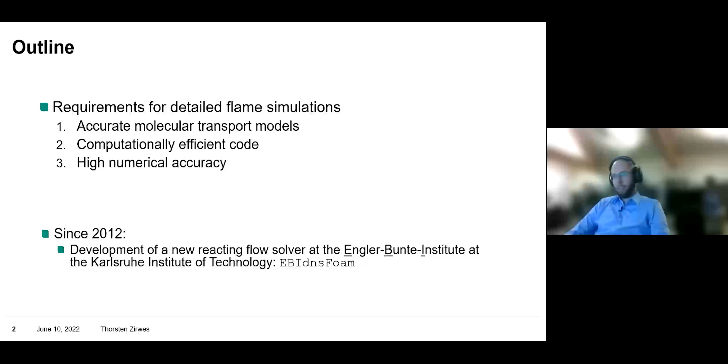In 2012, we started development of a new OpenFOAM solver that we call EBI-DNS-FOAM at the Engler-Bunte Institute at KIT, and since 2013 I became the lead developer of that code. In the meantime, the code is shared with many different groups - more than 20 research groups around the world are using it, and it's also used in industry. Over the past couple of years, some of the developments I've done have also been contributed back to both OpenFOAM and Cantera, which means I'm now listed as co-author of Cantera and contributor to OpenFOAM.

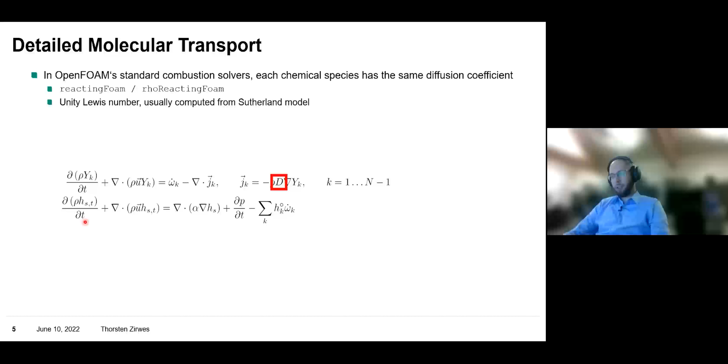Let's start with the first requirement: how do we get detailed molecular diffusion into our OpenFOAM solver? If you run any type of reacting flow simulation with the standard OpenFOAM solvers, for example reactingFoam or rhoReactingFoam, then what you are solving are basically the equations you see here. Here you see the balance equation for the species masses with convection, chemical reactions, and diffusion. Then we have an energy equation for the total sensible enthalpy. In the standard OpenFOAM solvers, the diffusion coefficient is the same for all species, which means OpenFOAM employs basically a unity Lewis number approach, and typically you compute your transport coefficients with a Sutherland model.

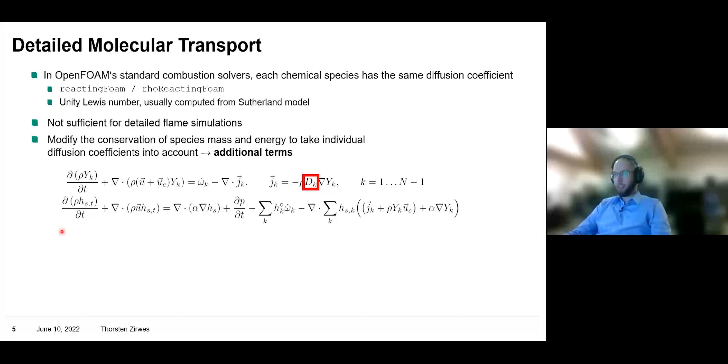But for us this is not sufficient, because we want to resolve the whole flame - we want to resolve all the species profiles. So we need detailed molecular diffusive fluxes, which means first of all we have to modify these equations. In our new solver, the equations we are solving look like this: first, you can notice that now the diffusion coefficient is different for each species. However, this also has some implications which lead to two additional terms. One term here is the correction velocity.

Depending on which diffusion model you choose, commonly you will choose the mixture average diffusion model, also known as the Curtiss-Hirschfelder approximation. It is not necessarily guaranteed that your diffusive fluxes add up to zero.

So then you define a correction velocity, and this correction velocity will take care that all your diffusive fluxes do add up to zero. Also, when all of your chemical species diffuse at different velocities, they have different contributions to the energy equation. This is why you get the second term here, where we take into account the different energy carried by the species moving with different diffusion velocities.

Then what you want to do is compute all of your transport properties, which means viscosity, heat conductivity, and the diffusion coefficients from detailed models, in our case from kinetic gas theory, which means first of all you need some accurate mixing rules.

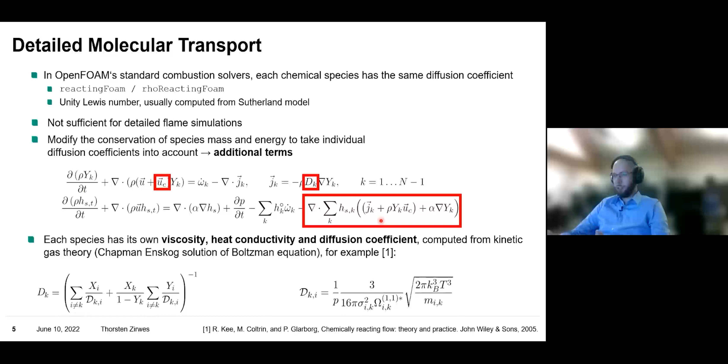How do we achieve these kinds of detailed simulations of the computations of the diffusion coefficients? This is done by coupling our OpenFOAM solver to Cantera. I think many of you will know Cantera. Cantera is an open source library which already implements all of these detailed models that we can then use to compute the transport coefficients.

We follow an idea that was first made by Gschaider and Rhem, who were the first to couple OpenFOAM and Cantera.

So the basic idea is, in OpenFOAM, we solve our basic governing equations, which means our total conservation of mass, the conservation of momentum, or Navier-Stokes equations, conservation of energy, which in our case is the total sensible enthalpy, and all of our species mass fractions.

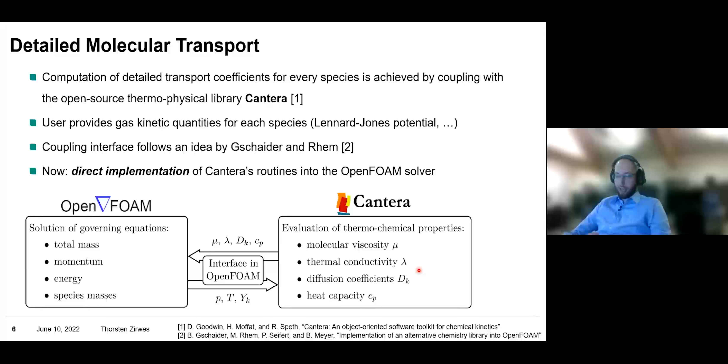And then in Cantera, we compute all of our detailed transport coefficients, as well as thermophysical properties like the heat capacities. By now, all of the Cantera routines that we need are implemented as its own OpenFOAM thermal library. So if you use our code right now, you don't even have to compile Cantera as an external library. You can directly compile our OpenFOAM thermal class, and everything is included there.

Of course, we also want to make sure that our code is correct. So therefore, we have a suite of validation cases. One of the most simple flame setups is a one-dimensional, perfectly premixed, freely propagating flame.

The idea of that flame, if you're not familiar with this, is we have a one-dimensional domain. In this case, for example, I computed a methane air mixture with a GRI 3.0 reaction mechanism on a one-dimensional domain, 10 centimeters in length, 10,000 cells.

Initially, the left half of the domain is filled with unburned gas. The right side of the domain is filled with the hot burnt gas. On the left, you have an inlet where your unburned gas is flowing into the domain. And if the inlet velocity is equal to the laminar flame speed, you will develop a steady state flame inside that domain.

And then we can run this simulation in Cantera and also with our OpenFOAM solver and compare, for example, the species profiles inside that flame.

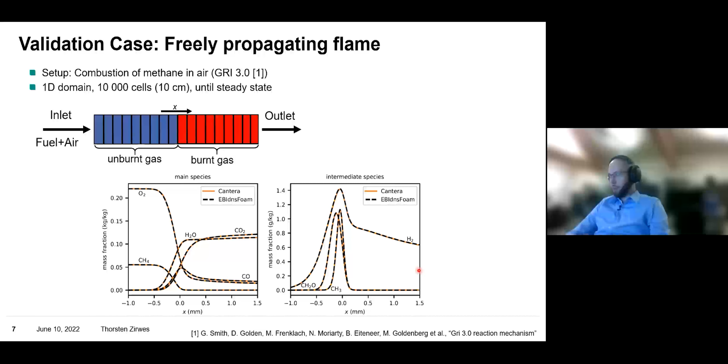And also, if we look at intermediate species, then of course, again, we see perfect agreement. Now that we can capture detailed flames...

We also want to make sure that the OpenFOAM solver itself runs as efficiently as possible so that we can run very large flame simulation cases. And for those of you who have run flame simulations with finite rate chemistry and a large number of chemical species and chemical reactions, you will know...

...that in these types of simulations, most of your simulation time may actually be spent on computing chemical reaction rates. So we came up with basically three solutions that help us cutting down the simulation time by a lot. In the following slides, I will go through these three steps.

The first step is to not use OpenFOAM's own ODE integrators. What we usually do in these types of flame simulations is have an operator splitting approach, where we do not use the reaction rates directly as source terms for our balance equations, but first compute an average chemical reaction rate averaged over the CFD time step.

For this, we need ODE integrators. The ones provided by OpenFOAM work, but they are not the most efficient. So we found that the CVODE integrator by Sundials performs very well and is very stable.

Secondly, we want to make sure that the code involved in computing chemical reaction rates is as optimized as possible. To achieve this, we employ automatic code generation. The idea is we have a tool that reads in a reaction mechanism and generates highly optimized C++ source code, which is very efficient at computing chemical reaction rates.

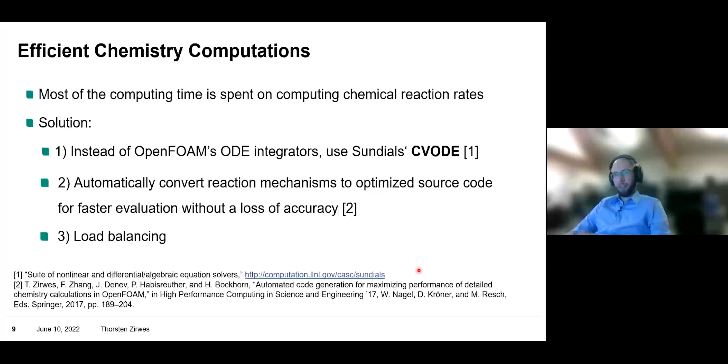So why do we need to take care of the chemical reaction rates? Why do they take so long? As probably most of you know, in reality, even for simple fuels like methane, unfortunately the chemical reaction is not as simple as this. In reality, it looks more like this.

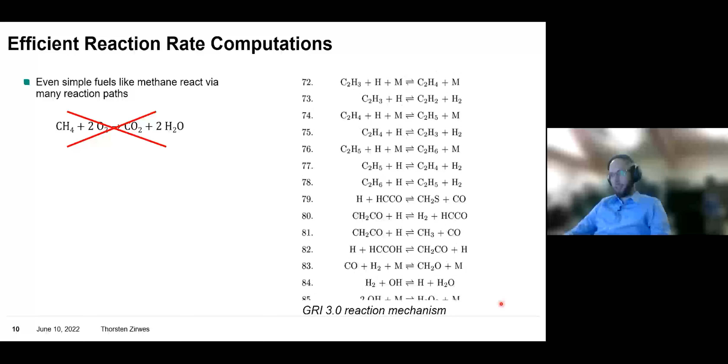Here you can see, for example, the GRI reaction mechanism. During the combustion of methane, you have a lot of intermediate chemical species, and these will react with hundreds, depending on your mechanism and case, maybe thousands of chemical reactions. And this, of course, is expensive.

It's not only expensive because we have a large number of chemical reactions, it's also expensive because some of those reactions are very fast. In general, you don't want to use these reaction rates directly as source terms for your balance equations, because then you have to run your simulation at the time step of the fastest chemical reactions. Instead, what we do is we use operator splitting.

So if we want to use our chemical reaction rate omega for species K, which is defined as the change in time of the species concentrations, what we do is we first assume that every cell in our computational domain is a closed batch reactor. So we completely ignore convection and diffusion, and then we can reduce our equations to a set of ordinary differential equations, ODEs.

And then we just integrate our reaction rates over the CFD time step dt. And then again, we need an ODE integrator, which takes many small time steps for the chemistry integration over one time step in the CFD simulation.

And then what we have is our species concentration at the beginning of the CFD time step, and the species concentration at the end of the ODE integration. And with this, we get an averaged reaction rate over the time step.

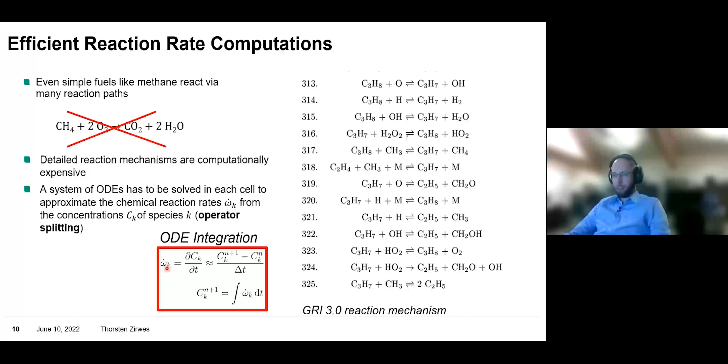And again, this is very time consuming. So in general, you want to use very fast ODE integrators, for which we use here CVODE by Sundials.

Now that we are using a very good ODE integrator in our new OpenFOAM solver, we can then do some more profiling of the performance of the code. So even though we are now using a good ODE integrator, we still might spend more than half of the total simulation time on computing chemical reaction rates.

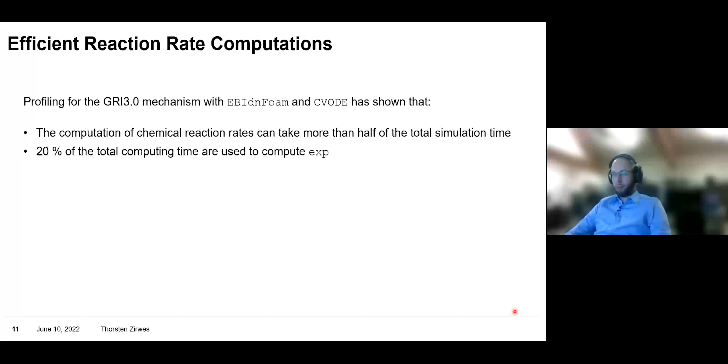What I'm going to show you next is profiling of the performance of our code using the GRI 3.0 reaction mechanism with the tool perf, a very simple profiling tool which is part of the Linux tool set. What you see here in this line is that we actually spend 20% of our whole OpenFOAM simulation on evaluating the exponential function. And of course, this is a lot.

So we want to reduce the time spent in the exponential function. Why do we need to evaluate that? Because of the chemistry, of course. One big part is the Arrhenius law. For each of our, let's say, hundreds of reactions, we need to compute our rate constants k. And if they follow Arrhenius law, then we have to compute the exponential function of the activation energy divided by the universal gas constant times the temperature.

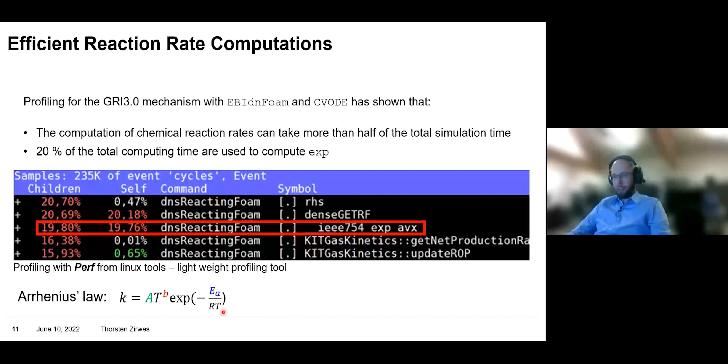Now, what's the concept of optimizing the computation of chemical reaction rates without losing any accuracy in our results? The general idea is the following: in most CFD tools, like OpenFOAM, the way you compute chemical reaction rates is by providing, first of all, a text file.

Your reaction mechanism file contains all of the parameters, let's say the Arrhenius parameters, for all of the chemical reactions. For Cantera, it might be an XML file. For Chemkin, it might be a dot input file.

But in general, it's some kind of text file. When you run your simulation, your CFD tool, let's say OpenFOAM, reads in this text file, and then on the fly will construct the different types of reactions and compute the chemical reactions based on that information.

What we want to do is not use a general implementation that works with any type of reaction mechanism. We want to use, for every different reaction mechanism, a different library which contains highly optimized source code, specialized on computing the reaction rates for that one reaction mechanism.

Therefore, I created a tool which reads in the text file, or the XML file in this case, of the reaction mechanism containing all the data for all the chemical reactions. And then it performs some optimization steps.

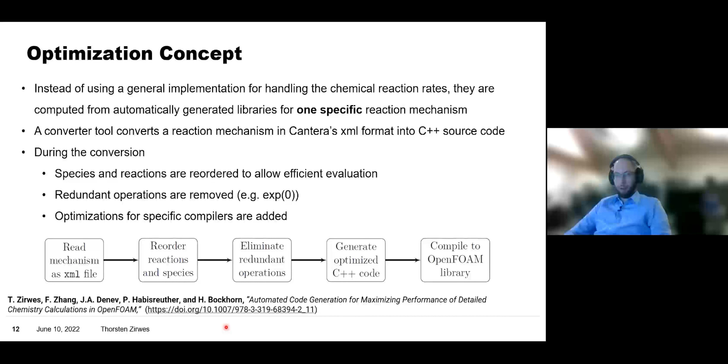And then the tool generates the C++ code to specifically compute reaction rates for one reaction mechanism. If you compile that C++ code, it will then generate an OpenFOAM library, which you can directly use to compute the chemical reaction rates.

Let's make an example. I won't go too much into details, but this would be an example for the XML file, the text file containing the reactions for the GRI reaction mechanism. This here would be the section for reaction number 316. And here you find the 3 coefficients for Arrhenius law: A, B, and the activation energy.

Now my converter tool reads in this reaction mechanism, does operations like reordering reactions and species, eliminating redundant operations, and then generates this C++ code. What you see here, for example, is a long list of all the values of A, B, and the activation energy divided by the gas constant for all the reactions in the GRI mechanism.

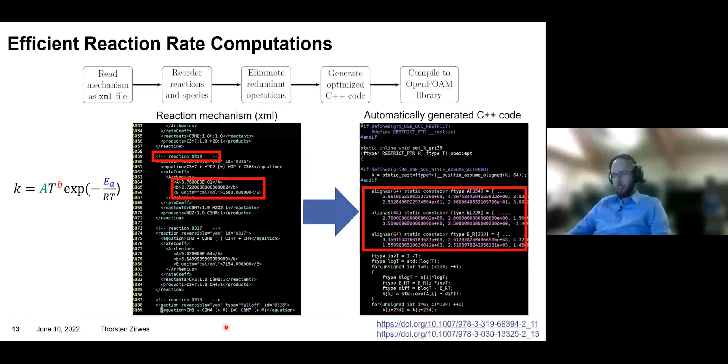For those of you who are interested in details, I will quickly show you some of the types of optimizations that are performed when generating the source code.

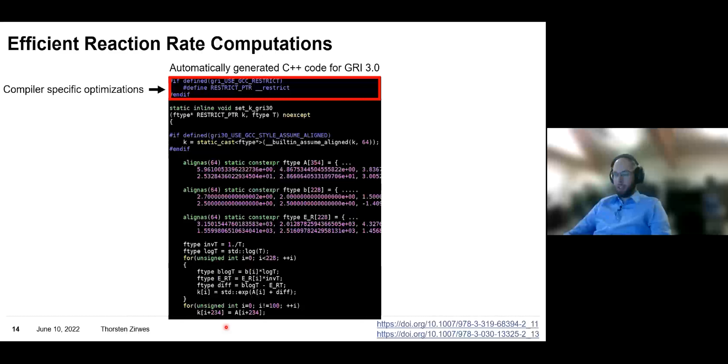At the top, you see some compiler-specific instructions. If you want code that is as fast as possible, you cannot use just standard C++. You have to use some compiler-specific features. Here, for example, for the GCC compiler, we use some specific intrinsics of that compiler. A very important aspect is the way you store all the data.

During the computation of the chemical reaction rates, we want to make sure that all the data we access is stored linearly in memory. This avoids things like cache misses and will speed up your code by a lot.

Then, of course, since we are generating this code for one specific reaction mechanism, all of the variables, like the number of reactions and the number of species, are known to the compiler at compile time. So the compiler can make much better decisions on other optimizations like loop unrolling.

Here, for example, you can see the loop that computes the rate constants from the Arrhenius equation. And here you can see why it is important to reorder reactions. Generally, in your reaction mechanism, you have different types of reactions. You may have plain Arrhenius reactions, fall-off reactions, P-log reactions.

What you want to do is group similar reactions into one loop, because this enables you to access vectorization on modern CPUs. In case you don't know, vectorization basically means in the same time you can do one floating point operation, let's say a multiplication, you can actually do 4 or 8 multiplications.

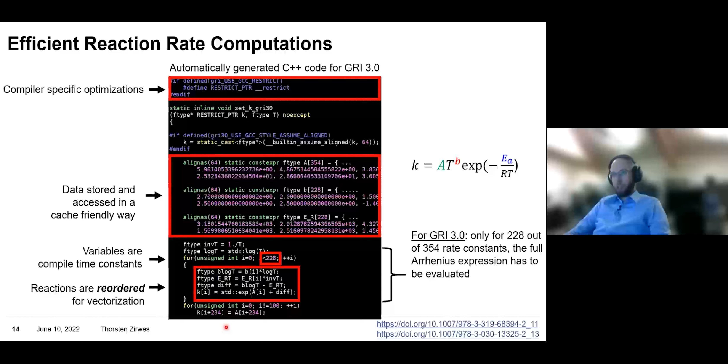Of course, writing fast code is easy. Correct and accurate is not that easy. So we also have some validation cases for that.

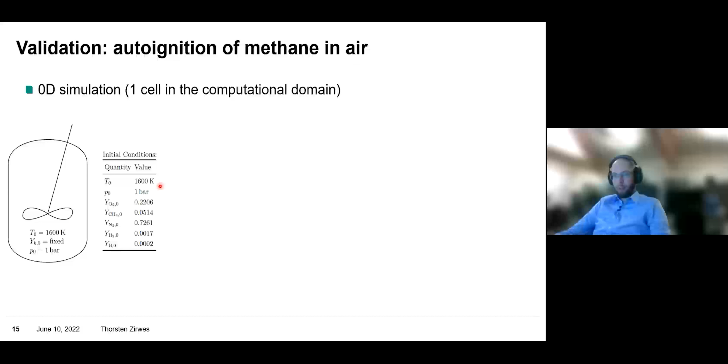The most simple validation case to just test the chemical reactions is autoignition, in this case for methane and air. This is a 0-dimensional setup, so you have no contribution of convection and diffusion, just homogeneous, perfectly premixed chemical reactions going on. Here we start with a temperature above the autoignition temperature, with a methane-air mixture, with some hydrogen to speed up the simulation.

Now, do we get a speed up compared to the standard reacting foam OpenFOAM solvers? What you see here is the time it takes to compute chemical reaction rates for the autoignition case from the previous slide, computed with the standard reacting foam solver. Here I ran the simulation with 3 different ODE solvers, Rodas, Rosenbrock, and Seulex, provided by OpenFOAM. And it takes about 0.02 seconds, just the time computing the chemical reaction rates.

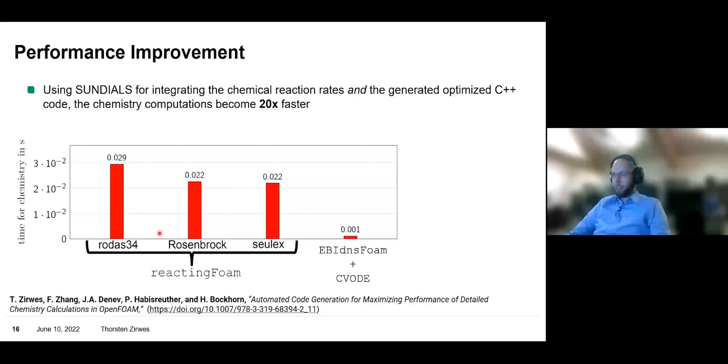If I run the same simulation with our EBI DNS-FOAM solver, using CVODE as ODE integrator, and using the automatically generated source code, we get about a 20x speed up for the computation of the chemical reaction rates. And again, very important, we get the same results within ODE solver tolerances, because we didn't do any modeling assumptions or simplifications. We just laid out the code in a way that is more efficient to execute, basically.

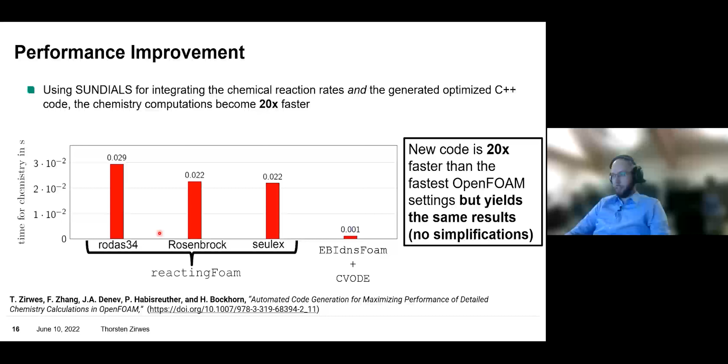Then you split this computational domain into subdomains. And you already know, if you perform operator splitting, you will do many time steps for the chemistry within one CFD time step. But you will take more time steps if locally the chemical timescales are very fast.

What you could do, for example, is to distribute the mesh differently, so you might have more cells in domain 0 than cells in domain 1. But of course, if the flame moves, or you have a turbulent flame, you will not know where the flame will end up. So statically doing the load balancing in practice doesn't work that well. So in general, you want to have some type of adaptive load balancing.

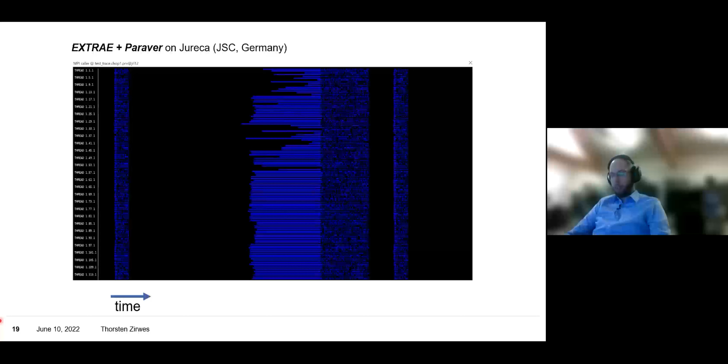Then, in order to find out how bad these load balancing issues are, I did some profiling on the MPI communication in OpenFOAM. Let me explain what you see here. So you see the same flame simulation of that Bunsen flame you saw on the last slide, but now run with 120 MPI ranks. Each line you see is one MPI rank, and the x-axis is time.

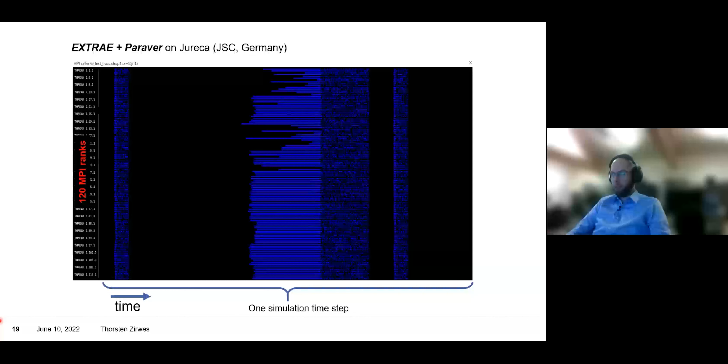And here we see one time step of the simulation. Blue means time spent in MPI routines. Black means useful computations. So in general, we want to reduce the amount of time spent in the blue regions as much as possible. What do we see here?

So here, for example, this is all the MPI communication related to the pressure correction loop in OpenFOAM. Here we see all the MPI communication during the solution of the conservation of chemical species. Here we see the conservation of energy. And then here we have the time spent on computing the temperature from enthalpy and also computing the thermochemical properties and transport properties.

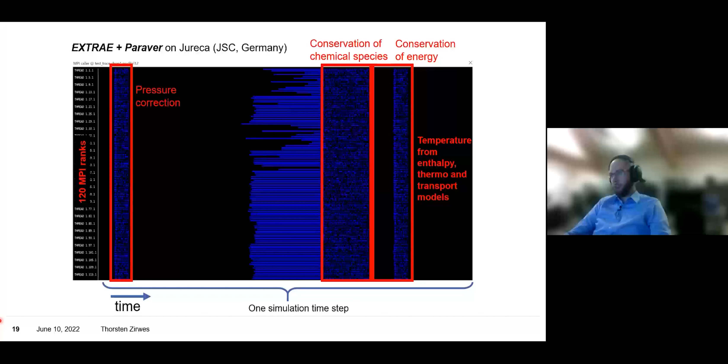So all of these thermo and transport computations, they are just local. They don't require any MPI communication. So on the right side, you don't see any blue parts.

What I'm interested in here is this part. So this part of the simulation time step is the computation of the chemical reaction rates with the GRI mechanism. And you see, first of all, this part, computing the chemical reaction rates, takes about half of the whole time step. And what you also see is that a lot of this time is spent in blue regions, which means it's spent waiting, basically.

So all of these different processes finish computing the reaction rates at this point, and then for all of this time, they spend waiting on the slowest process. If you look at this process here, it takes all of this time to compute the chemical reaction rates. It might be that there's some local reignition going on, or very fast timescales, so all of the other processes have to wait for this one process.

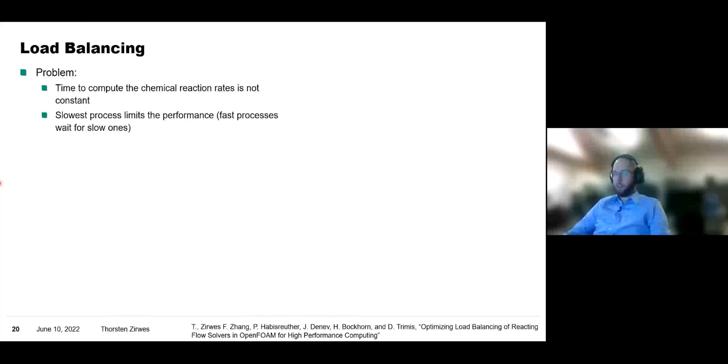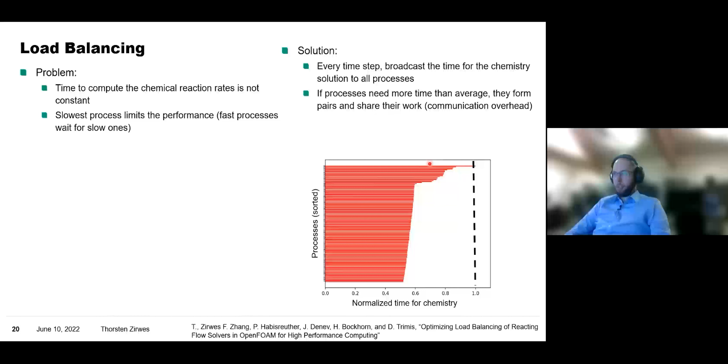So now we have a list on all processes where we know who is the slowest process and who's the fastest process. We form pairs between processes: the slowest forms a pair with the fastest, the second slowest with the second fastest, and so on. These process pairs then share their workload, giving us a much better balanced workload for computing chemical reaction rates, and therefore a significant cut in total simulation time.

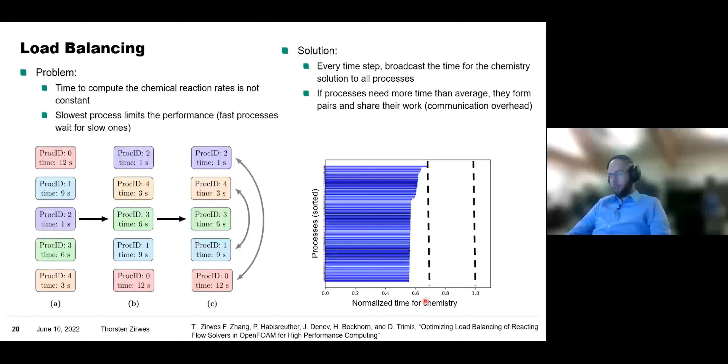You can see that this load balancing is not perfect, so technically this is not the optimal load balancing strategy. However, if you go to a very large number of processes, 10,000 or 50,000 MPI ranks, then only having pairwise communication is very good, because you want to avoid any type of communication across these large numbers of MPI ranks. So only having pairwise communication helps the overall scaling of the code.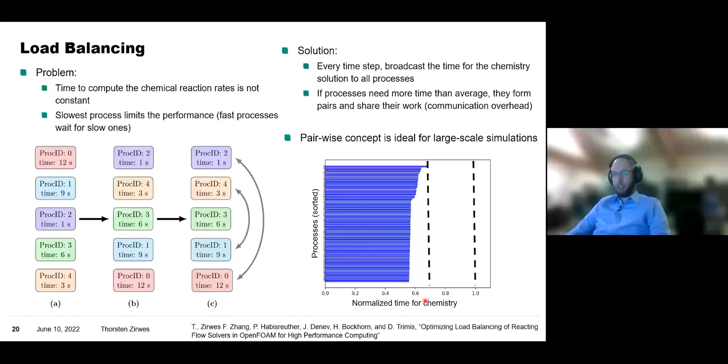Just to summarize this section, we created a new solver, EBIdnsFoam, where in typical simulations we can reduce total simulation times by about 70%. If you run with very large reaction mechanisms, you might have larger savings. Very importantly, this is without loss of accuracy within your ODE solver tolerances. We achieved this by switching from the OpenFOAM ODE solvers to Sundials ODE solvers, by utilizing automatically generated code, and by employing a load balancing strategy.

Now we also want to know that our OpenFOAM simulations are numerically accurate. One popular test case to show this is the Taylor-Green vortex, which I'm going to show you in a bit. But first it's important to understand the type of accuracy you can expect in OpenFOAM. OpenFOAM itself is a finite volume code working on unstructured grids, and OpenFOAM's overall methodology is limited to a second order scheme.

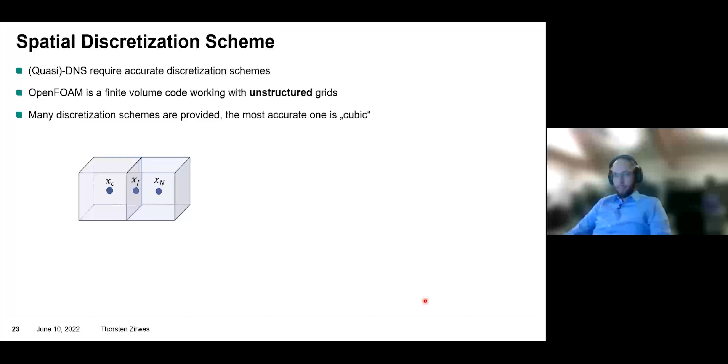However, OpenFOAM does provide some more accurate interpolation schemes, and the most accurate one is the cubic interpolation scheme. Let's say we have two cells in our computational domain: we have the cell centers C and the cell center of the neighbor cell N, and in between we have a cell face.

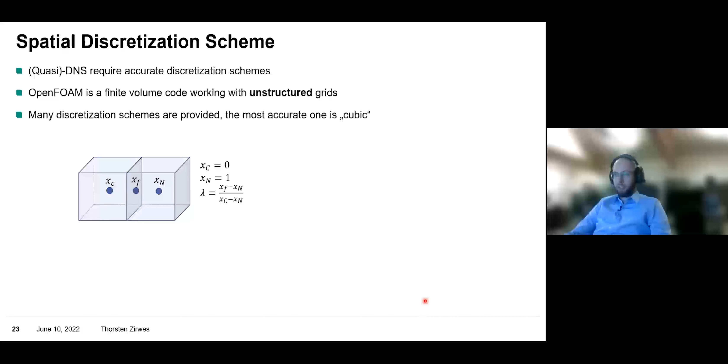XC is the coordinate or the location of the cell center of the left cell, let's say it's at coordinate 0. XN is the cell center of the right cell at location 1. Lambda here is a parameter that shows the relative distance of the cell face center between the two cell centers.

So this means using the cubic scheme will give you less numerical diffusion and better accuracy, but in general it's less stable. So you should only run this if you can afford low CFL numbers and also good meshes, close to equidistant meshes.

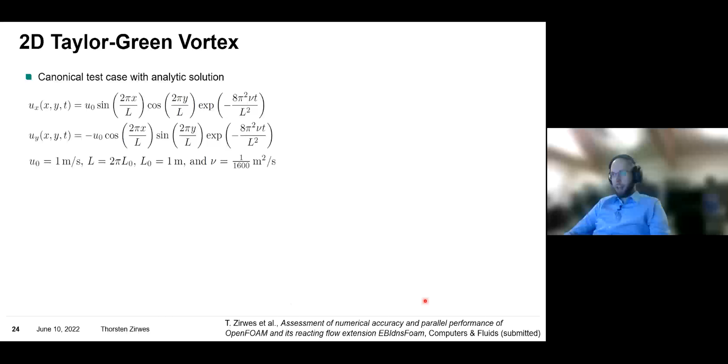One canonical test case to assess your numerical accuracy is the Taylor-Green vortex. This is a very simple test case where you start with a prescribed velocity field, and we have an analytic solution that we can compare our numerical accuracy to.

We run this with periodic boundaries, typically on a mesh with 64 squared cells, using second-order backward schemes in time. For these non-reacting cases, I will show you results from OpenFOAM's standard pimpleFoam.

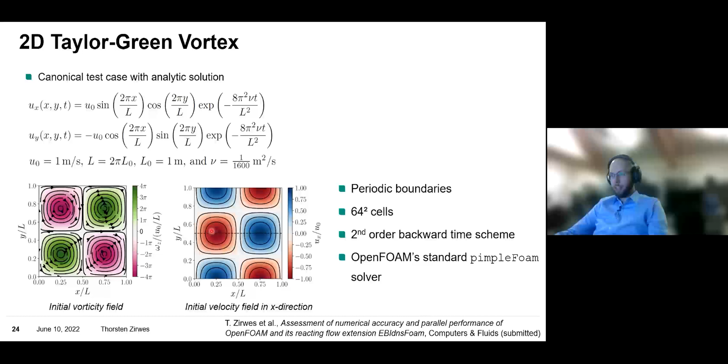On the next slide, you will see the velocity profiles along the center line here. So here you can see the x component of the velocity field along the center line after 10 dimensionless time steps. In gray in the background, you have the analytic solution.

If you look here, the green dash-dotted line is OpenFOAM's first order upwind scheme. So of course, if you use a first order scheme, you will have a lot of numerical diffusion, and you will not reach the analytic solution.

If we zoom in, you see the dashed blue line, which is OpenFOAM's second order linear scheme, which shows some differences to the analytic solution. In orange, you have OpenFOAM's fourth order cubic scheme, which is a lot closer. And then the black dotted line is the WENO scheme, which has been implemented by Jan Gärtner, a third-party library which you can also use to improve the accuracy of OpenFOAM's discretization schemes.

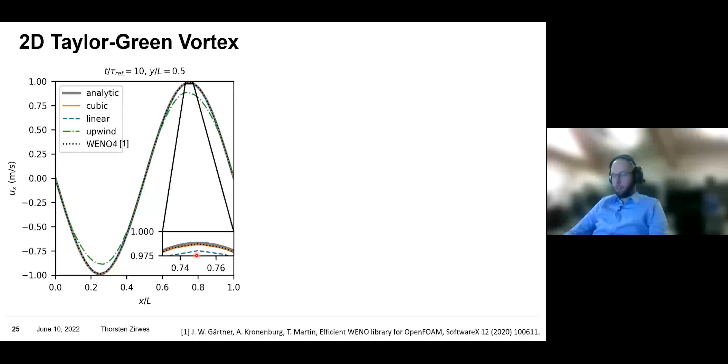A more interesting test case is the three-dimensional Taylor-Green vortex. Again, we start out with a prescribed velocity field in this 3D box. I ran this again with pimpleFoam on a mesh with 512 cubed cells.

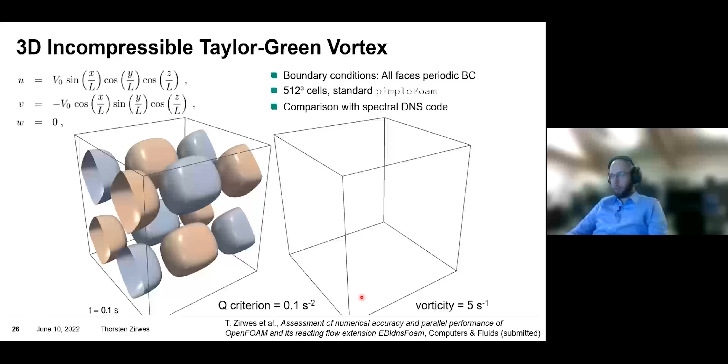Now we don't have an analytic solution to compare with, but there are some spectral DNS solutions that we can use as reference solution. On the left, you can see the initial flow field in terms of an isosurface of the Q criterion. On the right, you can see an isosurface of the vorticity.

As the simulation starts, the velocity field decays into a kind of pseudo-turbulent flow. And then we can compare our numerical solution to the spectral DNS code.

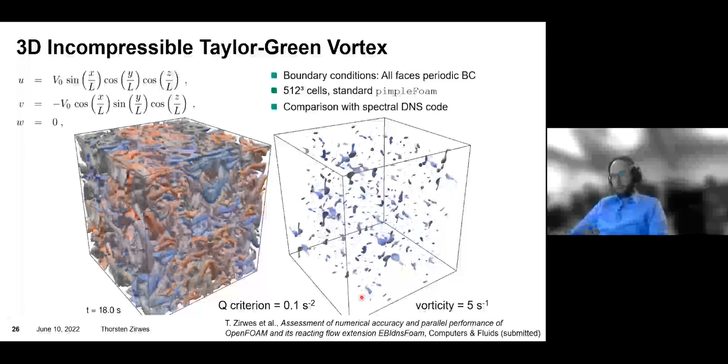One interesting quantity is the mean dissipation rate epsilon. The dissipation rate is defined as the change in kinetic energy over time, or equivalently, the volume averaged integral over the strain rate tensor S.

If I again run the simulation with the different discretization schemes available in OpenFOAM, I get this plot. You see the dissipation rate plotted over time inside that box. The black dashed line is the reference solution from the spectral DNS code.

Again, you see the first order upwind scheme is very insufficient to produce the correct results. The purple dashed line is OpenFOAM's second order linear scheme, and again we see some considerable differences to the reference code. But the fourth order cubic interpolation and also the WENO implementation yield results that are very close to the reference solution.

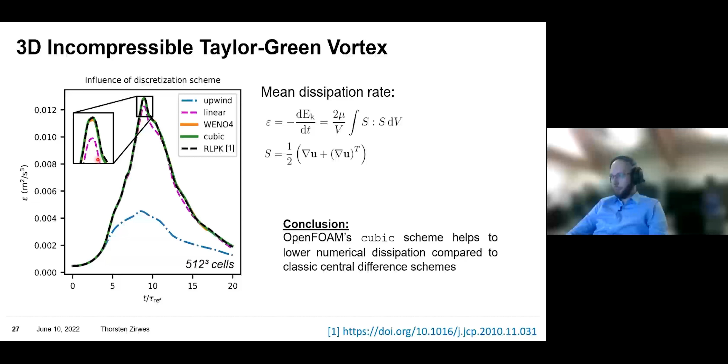So in conclusion, if you want to get results with OpenFOAM that are as accurate as possible, I would recommend you run your simulations with cubic interpolation schemes.

In 2019, Professor Thévenin proposed a mini symposium where he proposed a step-by-step benchmark suite to assess the performance of different combustion codes. This benchmark suite is based on the Taylor-Green vortex. So now we can not only compare the accuracy of OpenFOAM with different discretization schemes, we can also compare the results of OpenFOAM with other codes from groups that have run this benchmark suite.

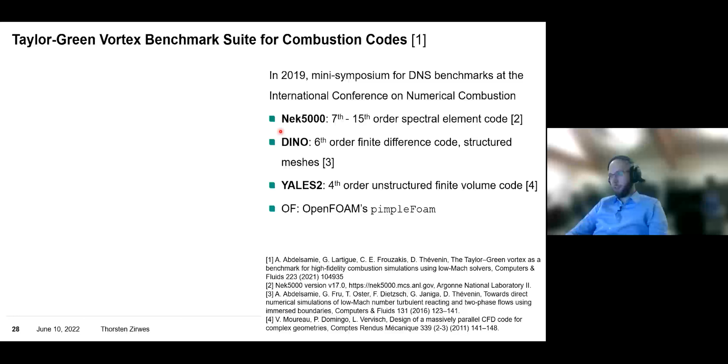One of the groups has provided results with Nek5000, a spectral element code with 7th to 15th order accuracy in space. We have results from the Dino code, a 6th order finite difference code, and results from YALES2, a 4th order unstructured finite volume code.

Here's another example: we look at the x component of the velocity along the center line in this box, at a dimensionless time of 12.11. Again, if I zoom into this part of the velocity profile, we can see that all of the high fidelity codes, including OpenFOAM, give really comparable results.

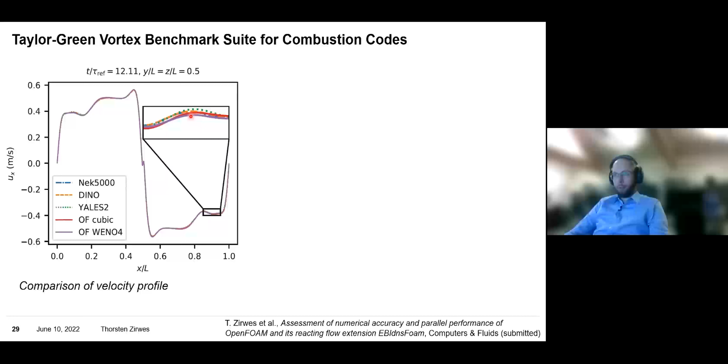Another interesting case is looking at the parallel scaling. Here you see the time it takes per time step for OpenFOAM's pimpleFOAM solver, depending on a different number of MPI ranks. The numbers here show the parallel scaling efficiency. Even at 2000 MPI ranks, we are still at roughly 100%, or ideal scaling. If we go to higher MPI rank numbers, we go into a superlinear scaling range, and even at 32,000 MPI ranks, we are still approximately perfectly scaling.

Now that we also have results from the other high fidelity codes, we can directly compare OpenFOAM's performance against them. Of course, these codes are a lot faster, which is expected because some of them are explicit, so they do less work per time step. Some of these codes only work on structured grids, whereas OpenFOAM always assumes unstructured meshes. So we would expect that OpenFOAM's time per time step is a lot slower than these other high fidelity codes.

Maybe just as a comment for those of you who want to run large-scale simulations: usually if you want to achieve good scalability, you want to use the linear solvers based on conjugate gradients, especially the pipelined preconditioned conjugate gradient solver, which was added I think in OpenFOAM 2106, and which scales very well up to just a couple of thousand cells per MPI rank.

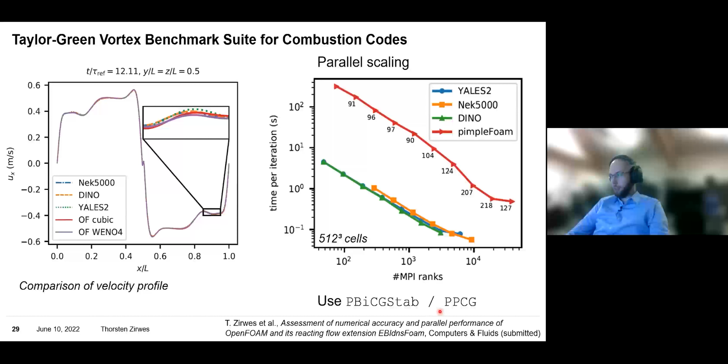Inside this DNS code benchmark suite is also a reacting case. One of the test cases is a reacting version of the Taylor-Green vortex, where we start out again with the Taylor-Green vortex velocity field, but then superimpose a fuel-rich region in the center, with oxidizer on the outside. We specify a temperature profile, and when we run the simulation, the flame will ignite and then interact with the Taylor-Green vortex velocity field. This part of the benchmark suite is run with 9 species and 12 reactions.

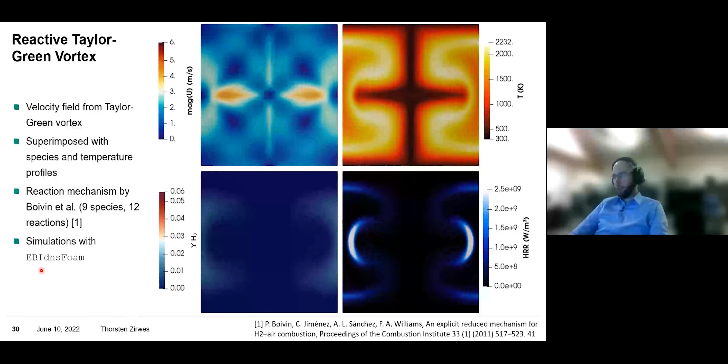Now I show results with our EBIdnsFoam solver. As the simulation starts, we have ignition and then the interaction of the flame with the Taylor-Green vortex velocity field. Here I ran the case on a mesh with 256 cubed cells.

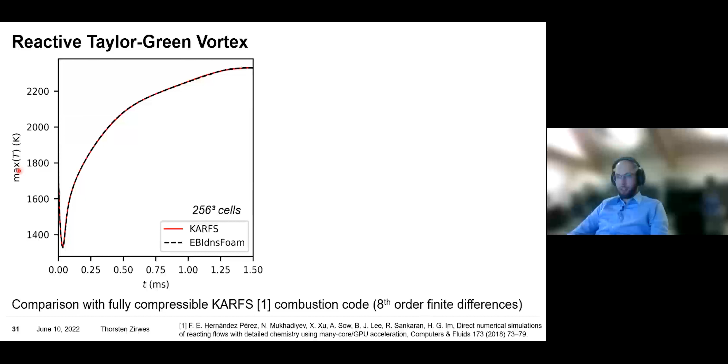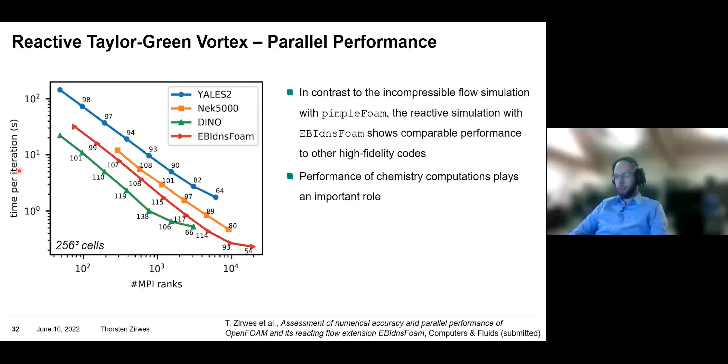To summarize this part: if you want high accuracy results in OpenFOAM, I would recommend using the cubic scheme, but be careful, it's less stable. By running some cases from the Taylor-Green vortex benchmark suite and comparing with other high fidelity codes, we have seen pretty good agreement with OpenFOAM. We have also seen excellent scalability of OpenFOAM, and in terms of overall performance, good agreement between our solver and the other high fidelity codes.

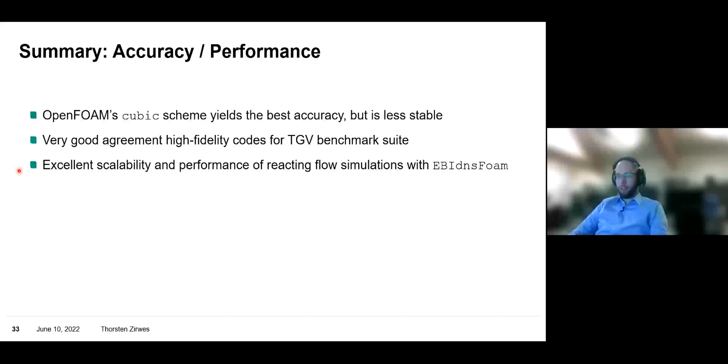Now I will show you some applications of OpenFOAM with our EBIdnsFoam code. One interesting case is so-called flame fingers.

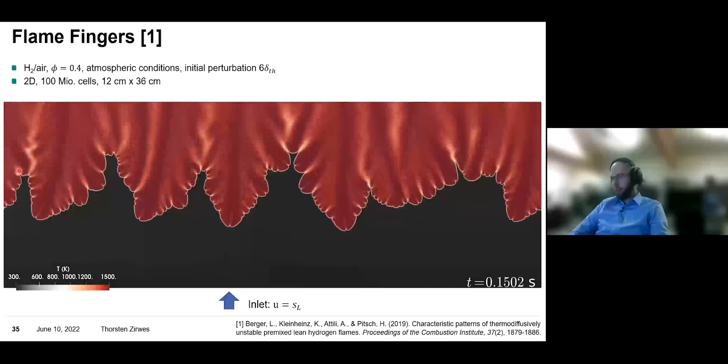Now that we have a code able to resolve the internal structure of the flame and solve for all of the molecular diffusive fluxes, we can perform interesting cases. Here we have a lean hydrogen flame in a two-dimensional domain, which propagates and then develops thermodiffusive instabilities. This was run on a mesh with around 100 million cells.

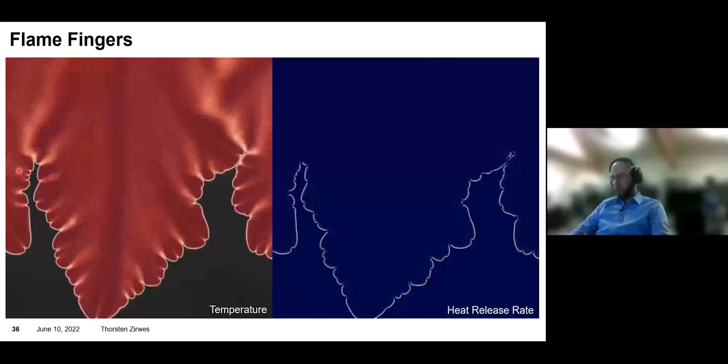Here we can zoom into this. On the left you have the temperature field, on the right the heat release rate. We can see nicely the formation of cells on the flame front, local extinction, and at the positively curved parts of the flame, the local increase in flame speed that drives these flame fingers.

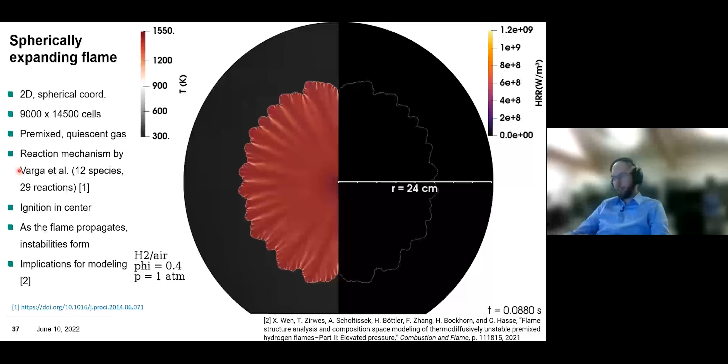We use this setup to evaluate some of the popular combustion modeling approaches. Here we have a similar case, now two-dimensional in spherical coordinates, on a mesh with 9,000 by 14,500 cells. You start off with a premixed quiescent gas, ignition in the center, and a reaction mechanism with 12 species. Again we form these instabilities, and in reference 2 we looked at the implications of this cell formation on flamelet combustion models.

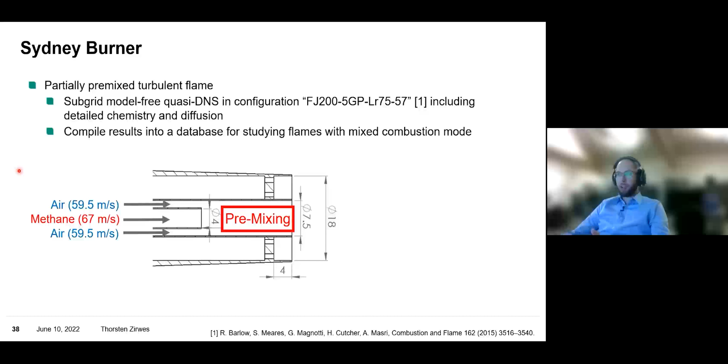Another application case I want to show you is the Sydney flame. The Sydney flame is a laboratory-scale burner that creates a partially premixed flame. The burner has an inner pipe with pure methane and an outer pipe with pure air. There is some length where these two streams can premix, but here we choose a length where we have only partial premixing of the two fuel streams.

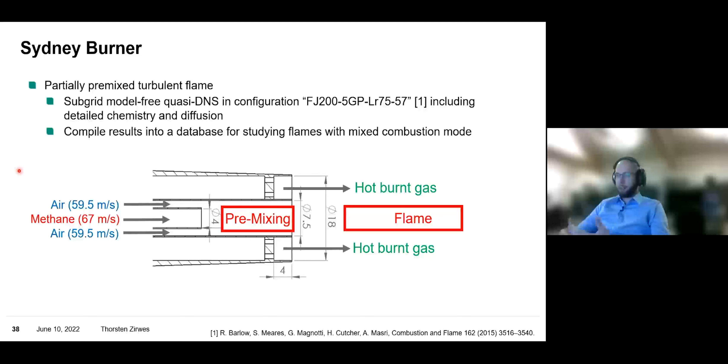On the outside you have a hot burnt gas flow, which ignites this partially premixed airflow. I ran the simulation some time ago on the Hazel Hen cluster in Germany, which at that time was the largest supercomputer in Germany, on up to about 30,000 CPU cores.

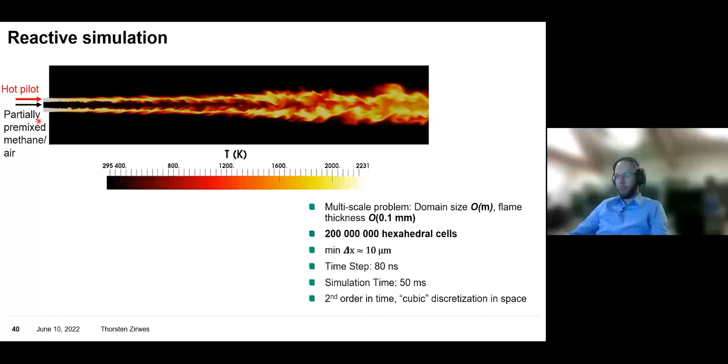In total we have 200 million hexahedral cells, refined towards the shear layer where the chemical reactions take place, running this with a cubic scheme in space.

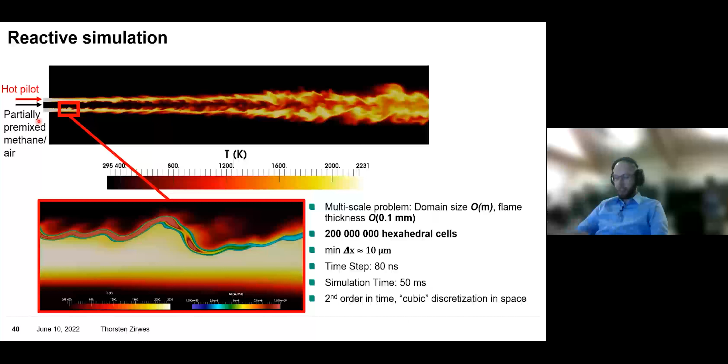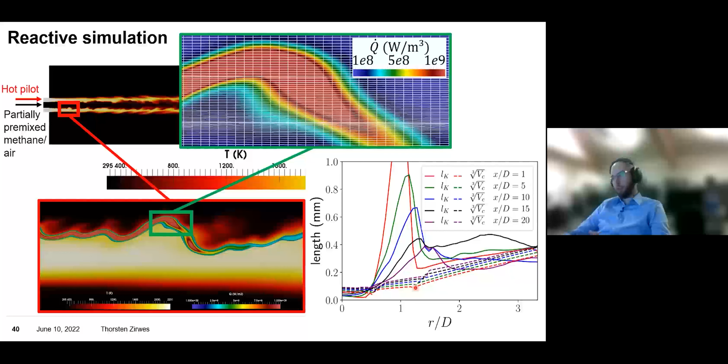The dashed lines show the cube root of the volume of our cells, which is basically a measure of our grid resolution.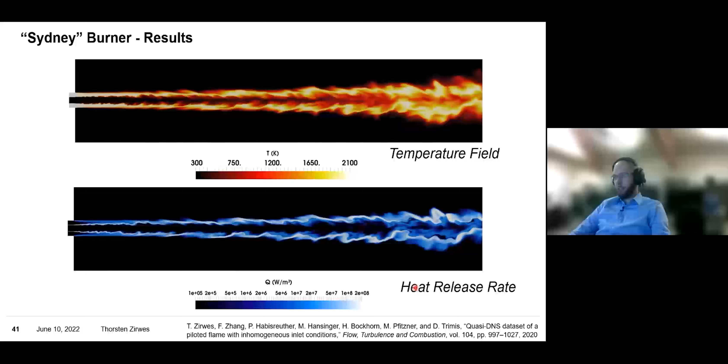These are some animations of how the flame looks. We have the temperature profile at the top and the heat release rate profile at the bottom. Now, when I zoom into this part of the flame, you can see the following picture.

On the bottom left is the pipe where we have the inner core flow of the partially premixed methane-airflow. On the 2D cutting plane, you see the temperature field with the hot pilot flow and the reaction zone. In the center flow, you see an isosurface of the vorticity showing the nice turbulent structures. Then as the flame ignites in the shear layer, you have an increase in temperature and viscosity, and these turbulent structures are destroyed.

One good thing about the Sydney flame is that we have a lot of experimental data. Here you can see at different axial positions through the flame, plotted over the radius, the temperature, the Bilger mixture fraction, the mass fraction of O2, and the mass fraction of water.

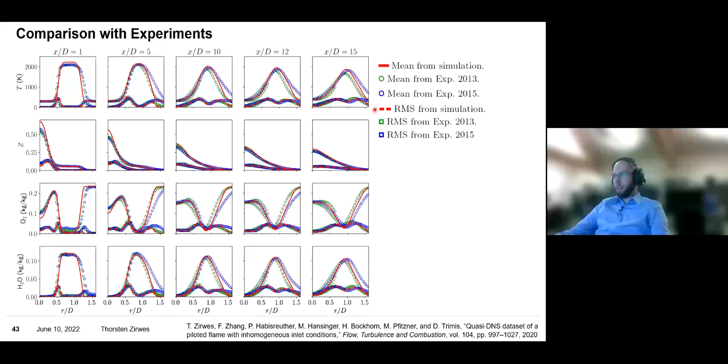The solid red line shows you the time averaged profiles of the simulation. The blue and green circles show you measurements from 2 different measurement campaigns, and the dashed line and the squares are the RMS values. You can see pretty good agreement.

Now, having done the simulation, we can do a lot of interesting analysis. I will just show you one quick example. So in order to decide what the local combustion regime is, meaning are we locally more like a premix flame or a diffusion flame, we can find different markers.

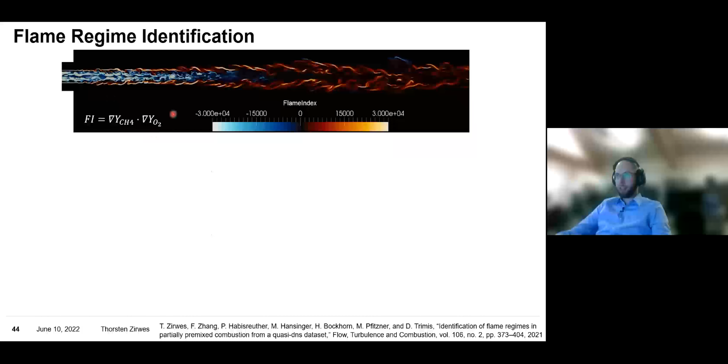For example, here we have the flame index, which is computed from the gradient of methane and the gradient of the mass fraction of oxygen. Here, this is the dimensional one. And we can also look at this in terms of the angle between the gradients. So if the gradient of O2 and CH4 point in the same direction, then we are probably in a regime which corresponds to a premix flame. And if these gradients are opposed, then we are probably in a regime where we have a diffusion flame.

We can also derive other quantities. From our detailed simulation, we can, for example, derive values for the gradient of the Bilger mixture fraction and the gradient of a progress variable. Then with this simulation database, we can assess how is the angle between these 2 gradients and where do we violate assumptions made in some combustion models.

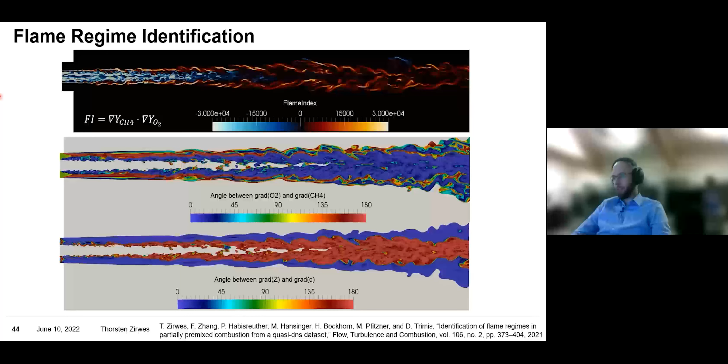Okay, so I hope I could show you a little bit of how we implemented detailed diffusion in our OpenFOAM solver, how we improved the performance of the simulation, and then give you some ideas of the types of problems that we can tackle with the solver. If you have any questions about the code or want to use the code, you can find my contact info here, and also some more links about the source code itself. And with this, I would like to thank you for your attention.

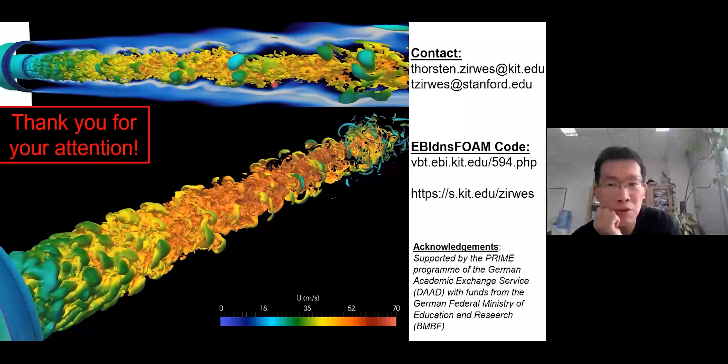I noticed that in your 2D simulation the domain is pretty large. The flame radius is very large, much larger than in experiments actually.

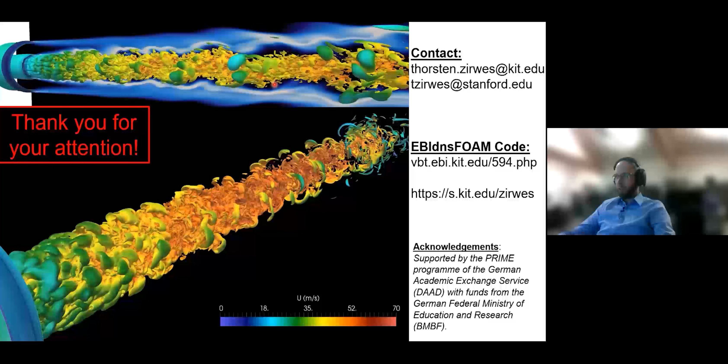Yeah, the animation I've shown you—I can even show you a different animation if I can find it. So this was the animation for a flame at one atmosphere. Let me see if I can find this quickly. For 1 atmosphere, the flame is relatively stable, so you need a large radius until the first cellular instabilities occur, because before that the flame is pretty small. You have high flame stretch, which stabilizes the flame.

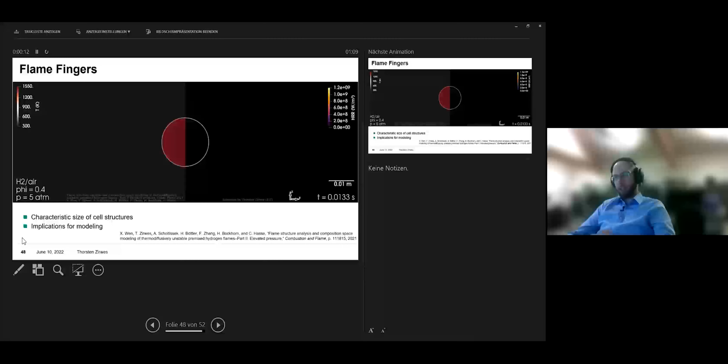Here, if we go to another flame at 5 atmospheres, the flame is a lot thinner, and therefore you get a flame that is much more prone to thermodiffusive instabilities. So in this case the flame can be a lot smaller—instead of 24 centimeters, this has a radius of, I think, 8 centimeters. So you see the occurrence of these structures a lot earlier.

So for this case, did you do the simulation only for the half domain or the full domain? This is half domain. I noticed that there's a strange thing happening at the top and bottom side—the instability first occurs there. Yes, this is strange, you should not evaluate your flame cells at the boundaries. I agree.

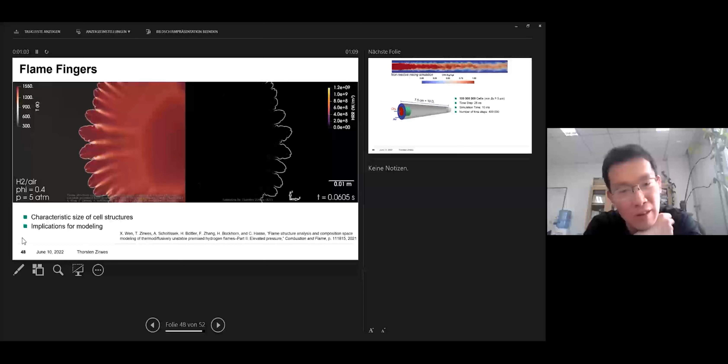Yeah, we've had this kind of difficulty before, because this instability should occur randomly in different places, but it always starts from the boundary. We don't know why. This is the reason I chose to do a half sphere simulation and not a quarter, for example—so you have a large portion of the flame that is far away from the boundaries.

So if you do a quarter domain simulation, maybe the instability occurs later—I'm wondering, I don't know. Right, another thing you can do, like in the 2D Cartesian case, is have an initial perturbation in the flame. Here for the spherical case I start with a perfectly spherical flame, and then the onset of thermodiffusive instabilities comes basically due to numerical errors from the flame being aligned differently to the mesh and so on. So this is where you get the first instabilities.

Okay, thank you, thank you very much. It's a very nice talk.

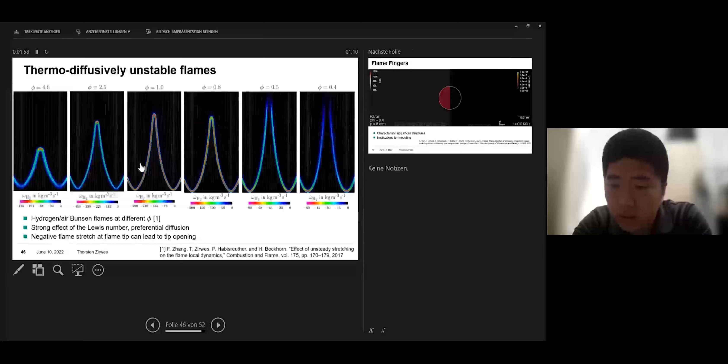Thank you. Okay, here's a question raised by Junjun Guo: "Hi Thorsten, thank you for your talk. Forgot about the efficiency—did you compare the accuracy of OpenFOAM's ODE integrators and Sundials' ODE using the same tolerance?" Yes, of course, the numbers I showed you are run with the same ODE tolerances with realistic numbers.

I could go up to 100x speed up if I use very fine tolerances, but that would not be a fair comparison. So at the usual tolerances we run our simulations—absolute tolerances of 10 to the minus 10, relative ones of 10 to the minus 7—these are the numbers we get.

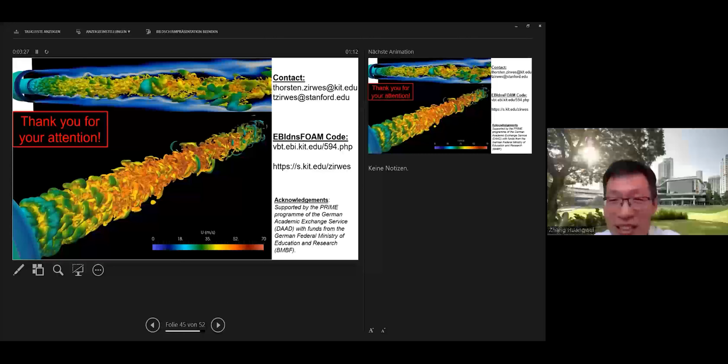Yeah, thank you. I think in the United States it is very late now. Yeah, now we have 1 PM here. Okay, hope to see you soon physically. Yeah, of course. Thanks again for inviting me, maybe we will see each other in person at a conference sometime. Yeah sure, we learned a lot from your talk. Hopefully we can collaborate in the future. Of course, yeah, always. Okay, thank you, thank you everyone. Thank you, bye-bye, bye-bye, thank you. Bye-bye, thank you, thanks Thorsten.